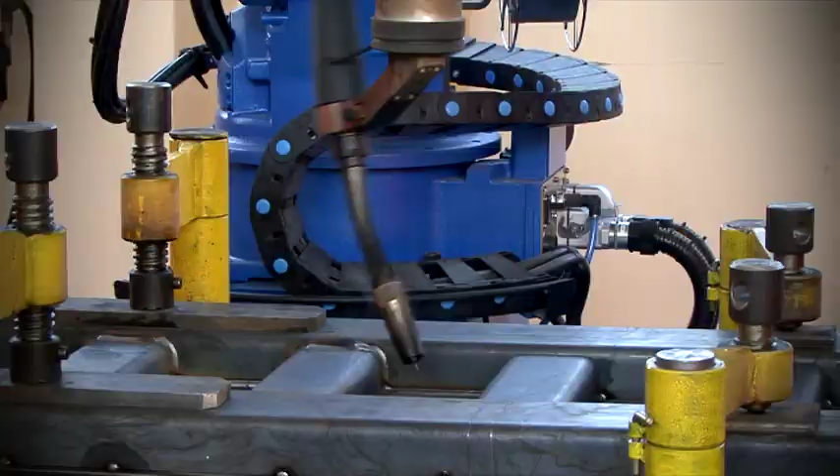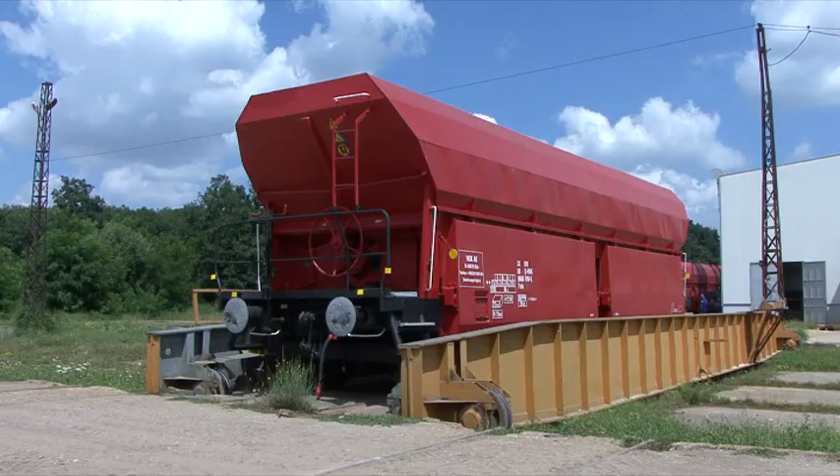Traktsia AD is a private joint stock company specializing in the manufacture, repair and modernization of freight wagons. As a successor of wagon repair plant Samuil, founded in 1972, Traktsia AD combines long-time experience with traditions in repair work, in accordance with European norms and requirements.

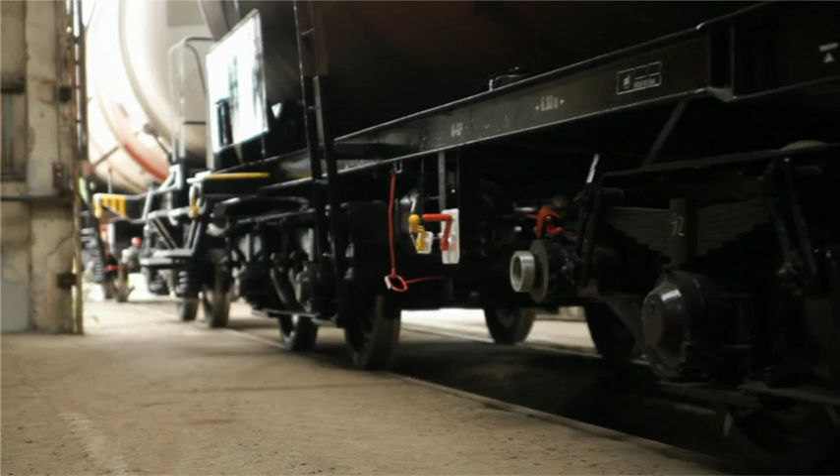Thanks to its many years' experience and the high quality of its products and services, Traktsia AD has built long-standing partnerships with companies like VTG, GATX, On Rail, NACCO, Ermewa, ERR, Locotrans, Lukoil, BDZ, Holcim, DB Schenker and others.

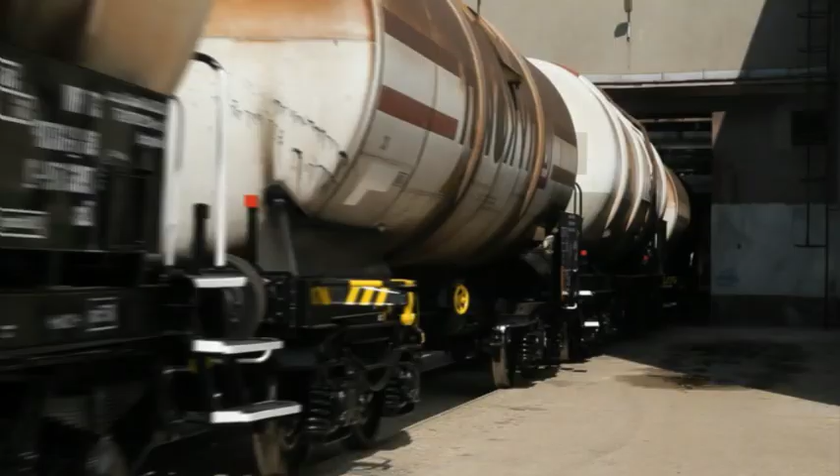Traktsia AD's production activity is divided in two main lines. The first main line is freight wagon manufacture. The company manufactures open freight wagons and flat wagons in compliance with all European standards and normative documents, including those concerning TSI wagons and TSI noise.

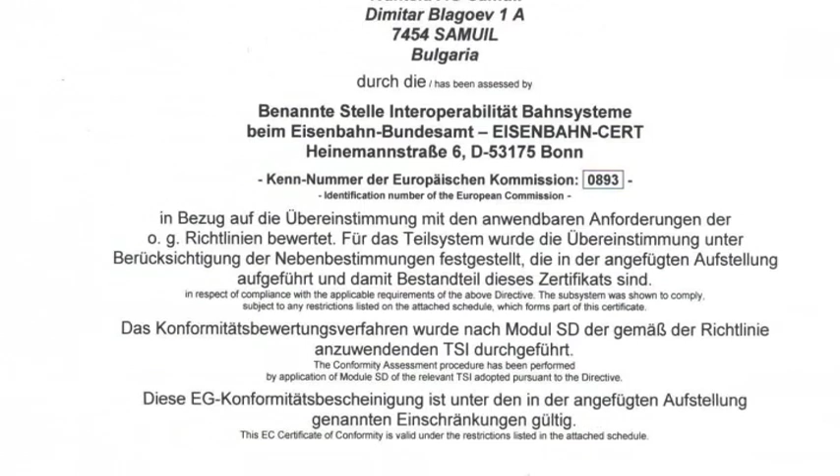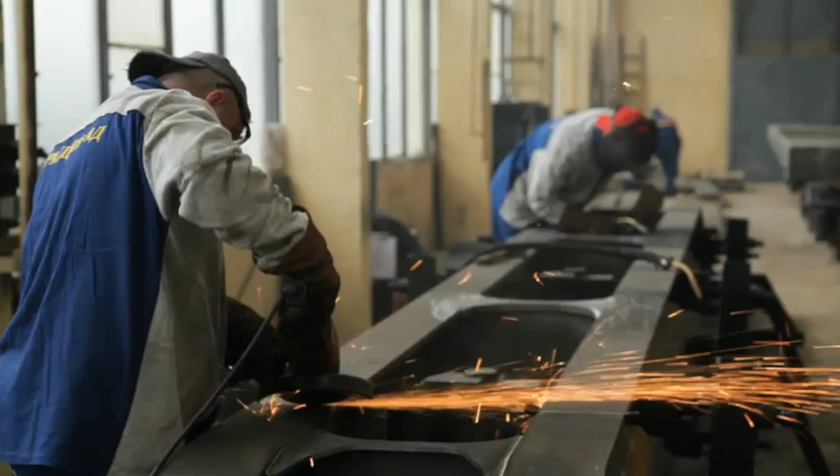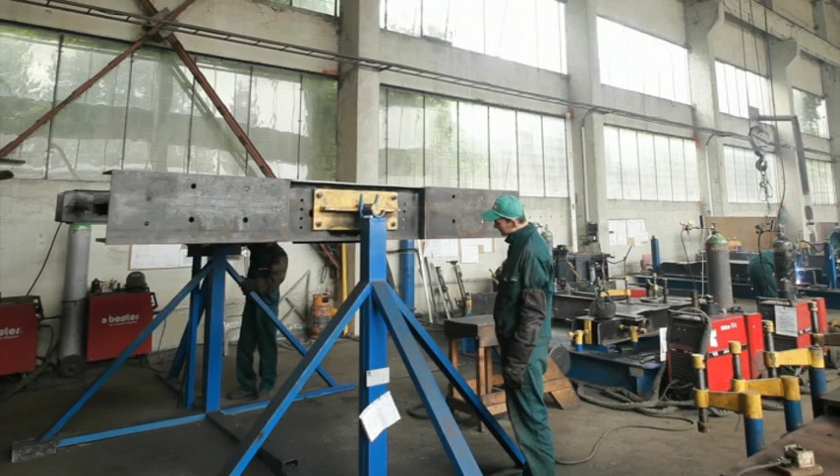The manufacture of the wagon frame main assembly is carried out in two separate facilities. For this process, the necessary technological equipment has been installed, including jigs for each single assembly, welding positioners ensuring a high quality of welding process, a portal for automated underflux welding,

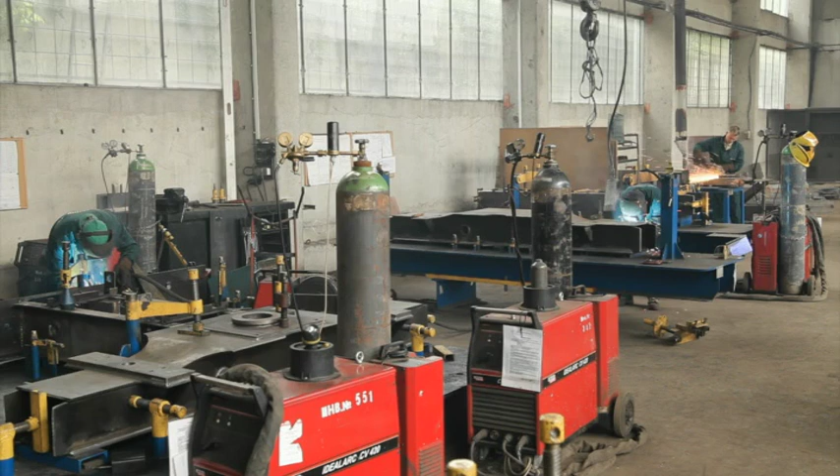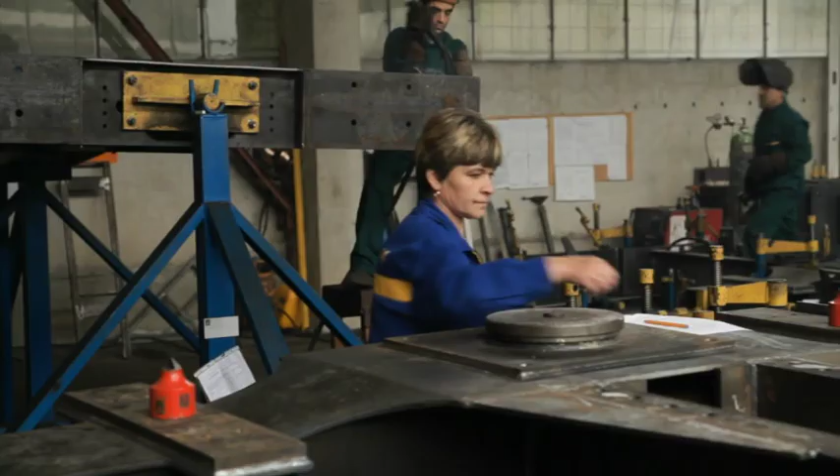machines for welding in a protective gas environment, hoisting equipment, monitoring and measuring equipment, as well as all the necessary storage areas. The final frame assembly is done on special jigs that guarantee the correct geometrical dimensions and the proper positioning of different assemblies and parts.

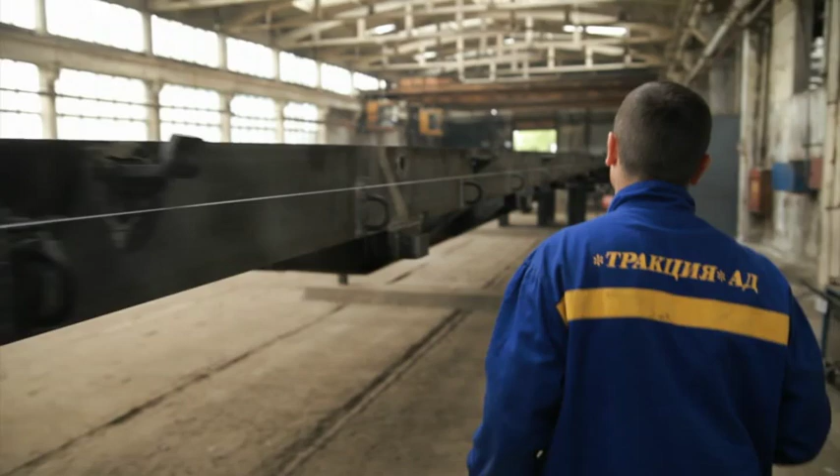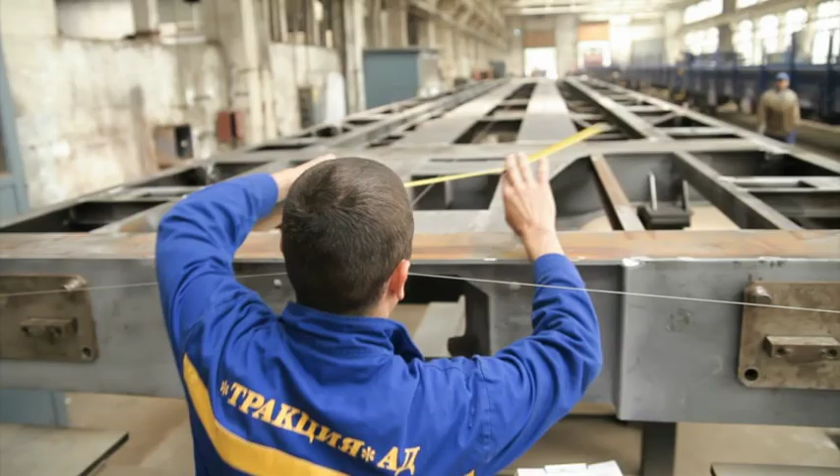After being installed, the frames are set on a positioner for the final completion of welding process. The frame's dimension control is carried out on a measurement stand designed to ensure that all the dimensions specified in the quality standards for this type of production are duly measured. Having passed quality control, the frame is fitted with the necessary elements and assemblies in different stations, depending on the manufactured wagon type.

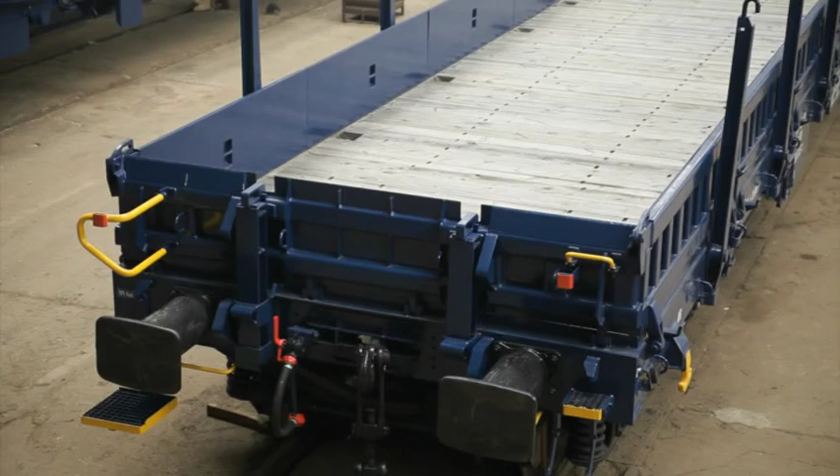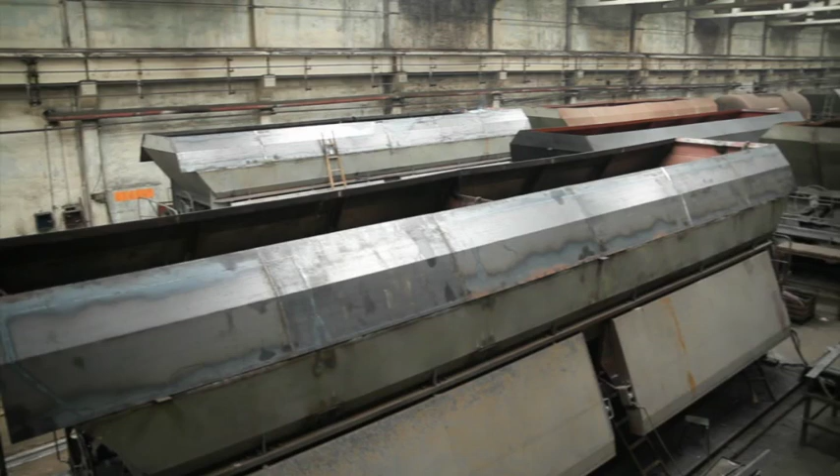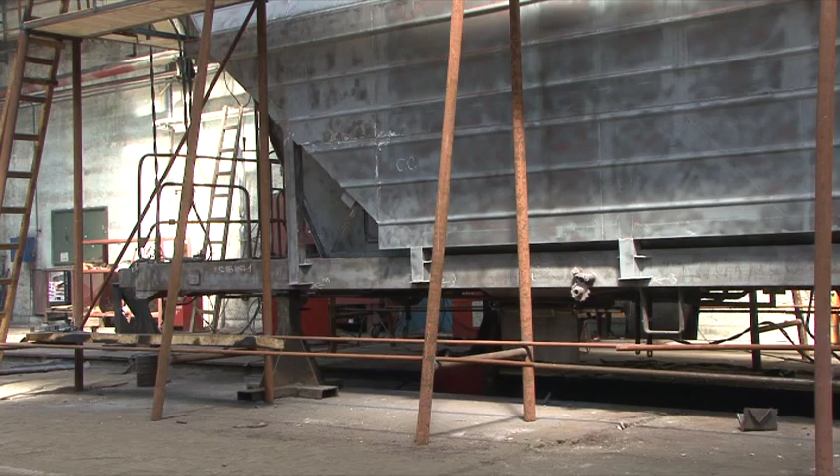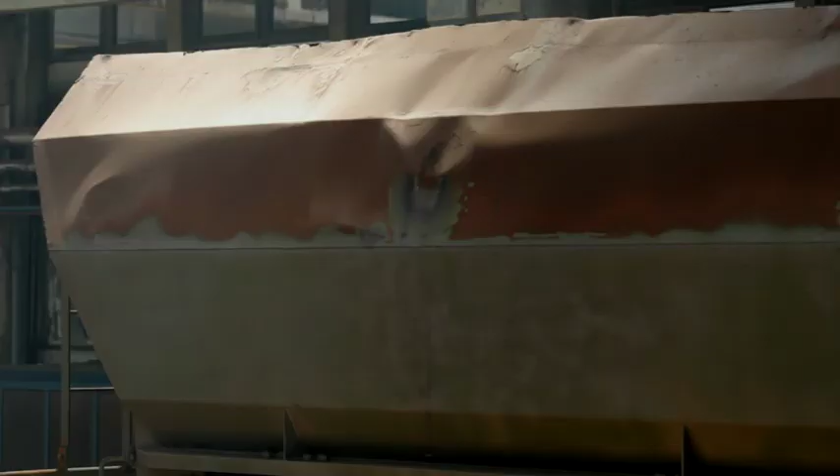The second main line is implementation of planned and unplanned repairs of freight wagons, as well as modernizations of different kinds. This work is carried out in two main production facilities. The first facility is for repair of the frame and body of the wagons. There are 12 workstations. Each of them is equipped with the necessary machinery for welding in a protective gas environment, gas flame cutting equipment, mechanical and electrical tools, etc.

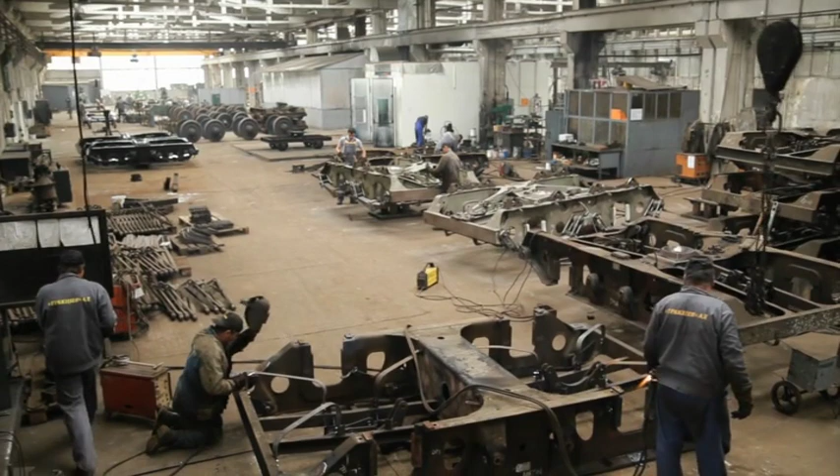A hydraulic stand is installed in the facility to ensure the right geometry of the wagon body. The second facility is for the repair of wagon running gear. The facility includes two main sections. One of them is for repair to the bogies. It has 6 workstations for checking and replacing the unfit parts of a bogie frame and lever brake system.

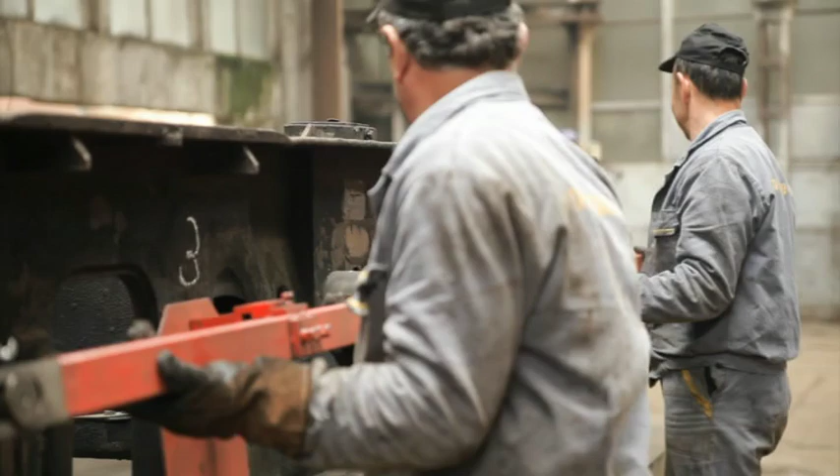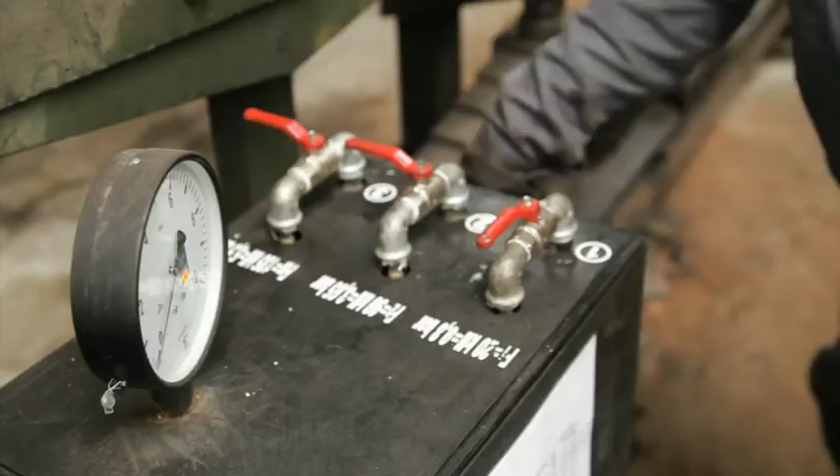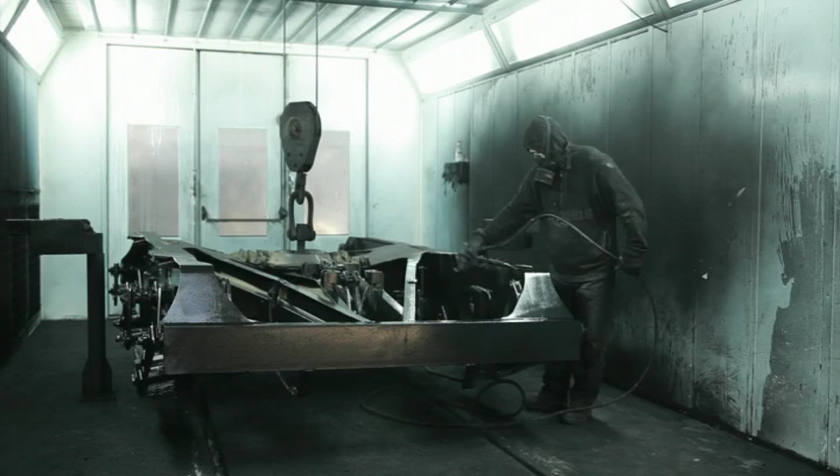A frame and bogie measurement stand, a control device for bogie springs and coiled springs. On completion, the repaired bogie is painted and baked in a combined paint chamber.

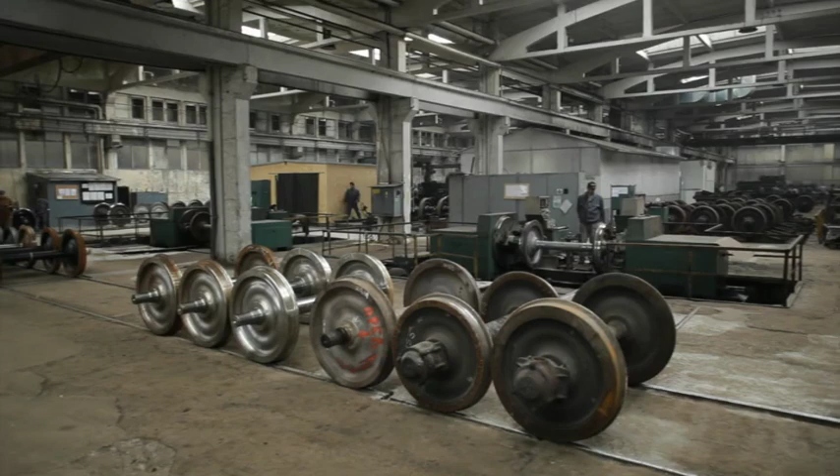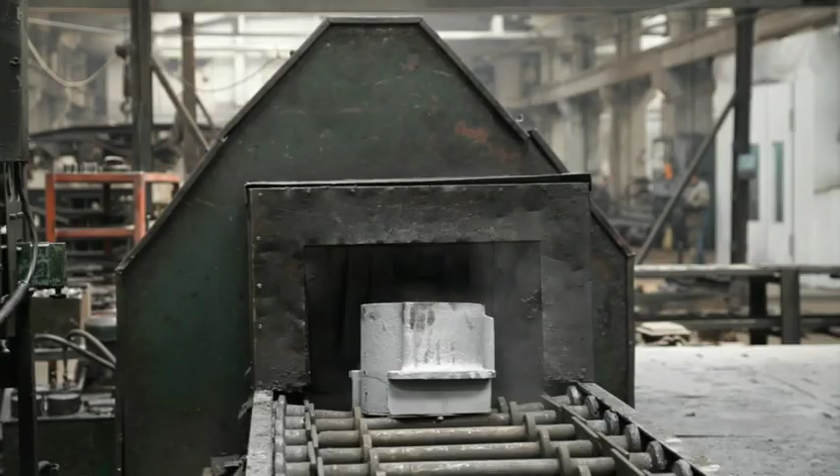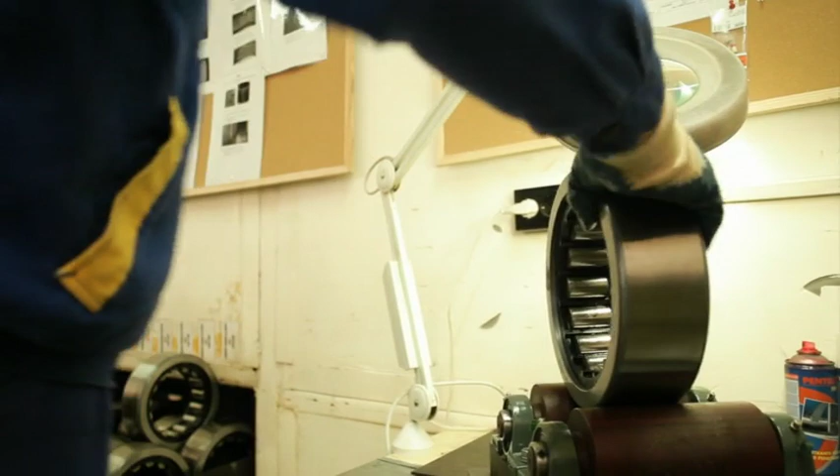The other section is for wheel axle repairs. It has a robotic complex and a production line for dismantling bearings and bearing boxes and washing them in specialized machinery. The cleaned boxes and bearings undergo a final cleaning and quality control and are then prepared for assembly.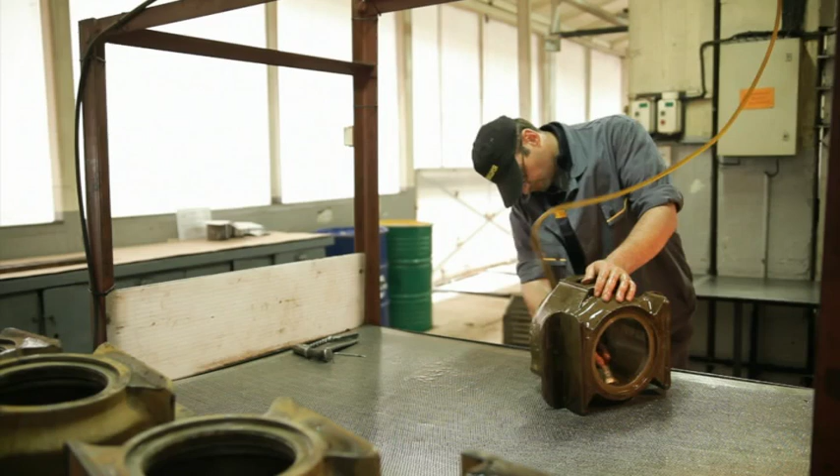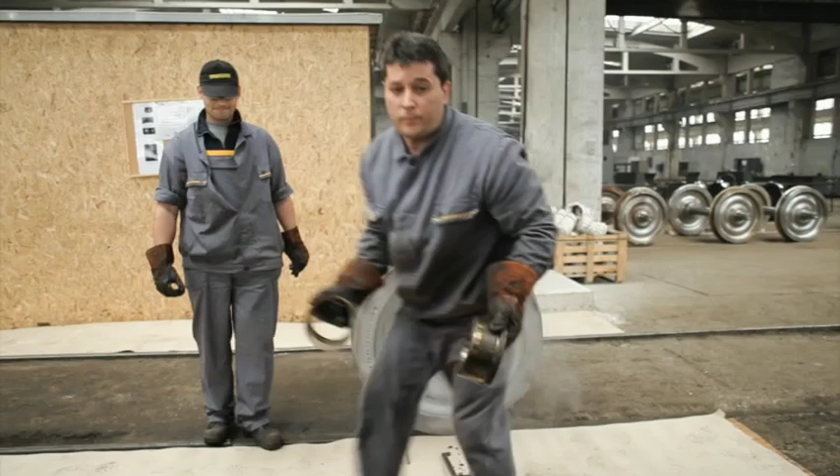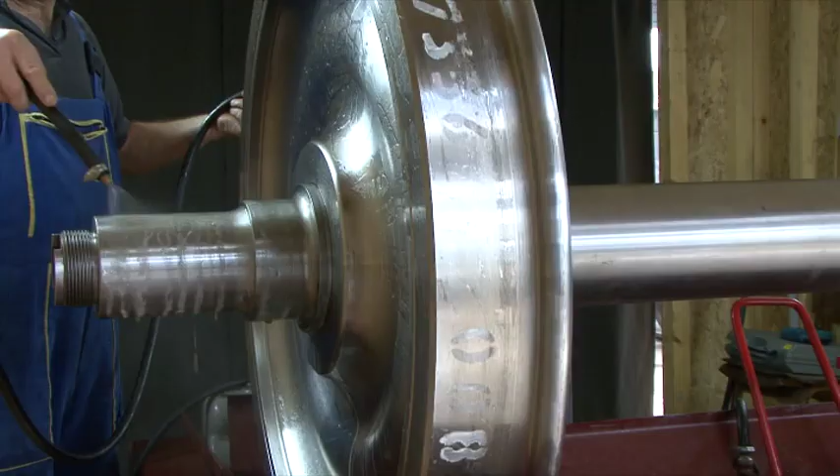The wheel axles are cleaned of old paint. The internal bearing bushes and labyrinth rings are dismounted with the help of induction heaters. The cleaned wheel axles pass ultrasonic and magnetic defectoscopy, performed by specialists that have all the necessary international certificates for this kind of activity.

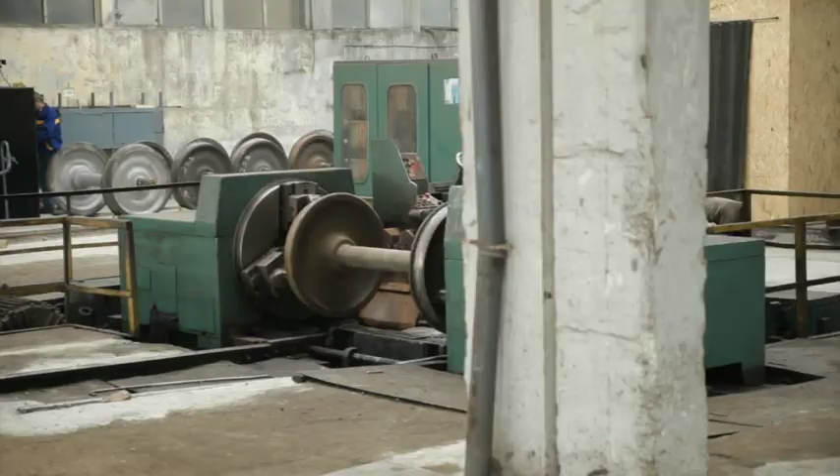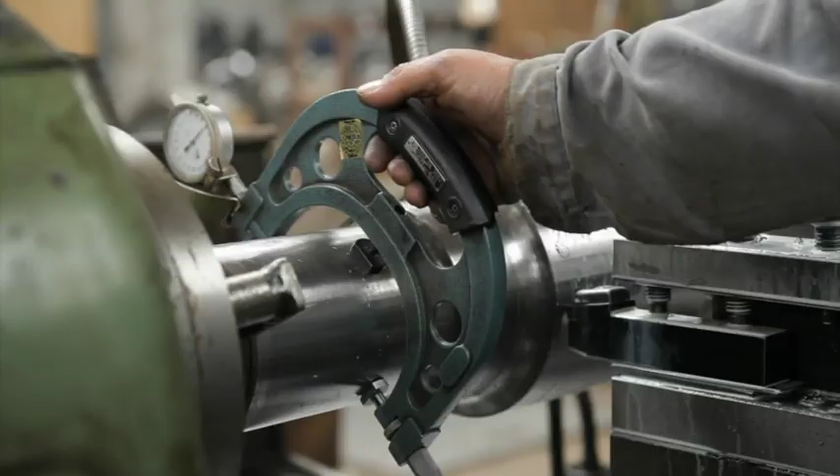The rolling surface processing is carried out on two specialized CNC-facing lathes. Traktsia AD is able to replace the unfit wagon wheels with new ones. After quality control and processing, a new coat of paint is applied on the wheel axles in a paint chamber.

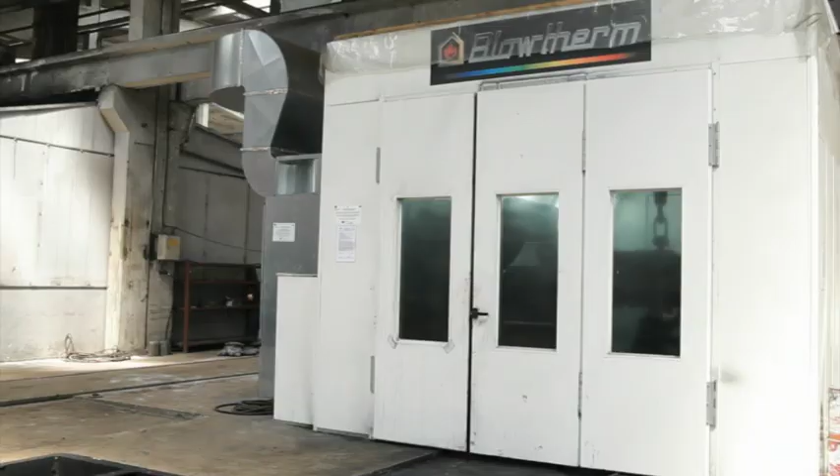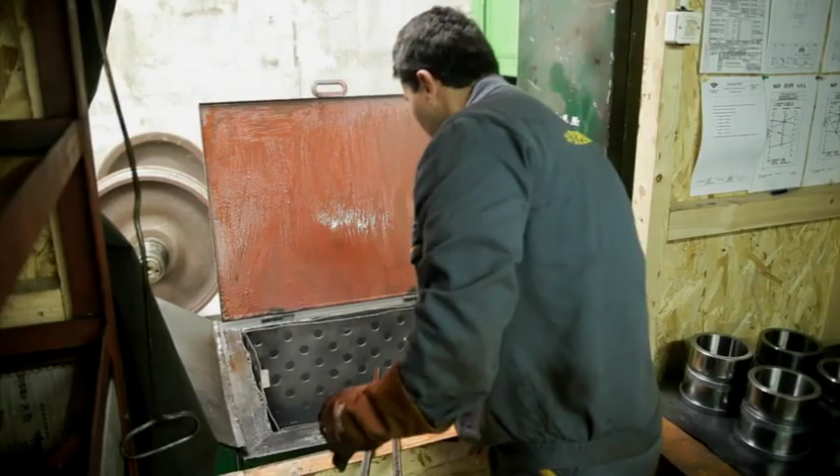The mounting of labyrinth rings and bearing bushes is done in a separate room with the help of induction heaters and oil bath heating. The assembly of bearings and boxes is done in a specialized room fitted with all the necessary devices and measuring tools.

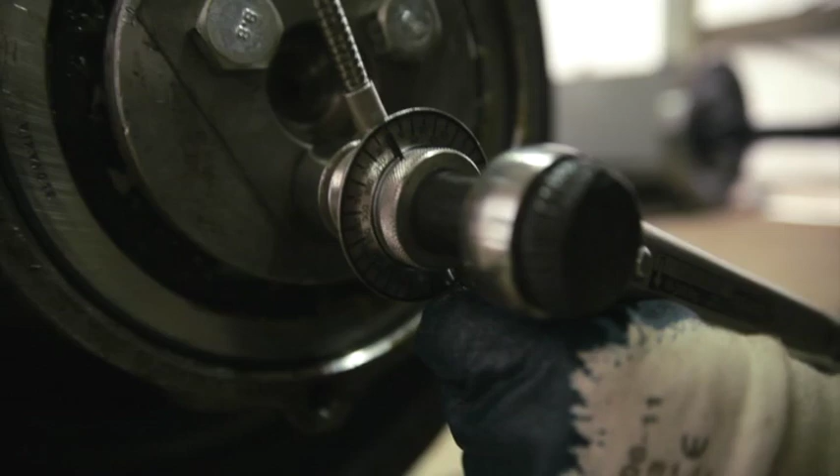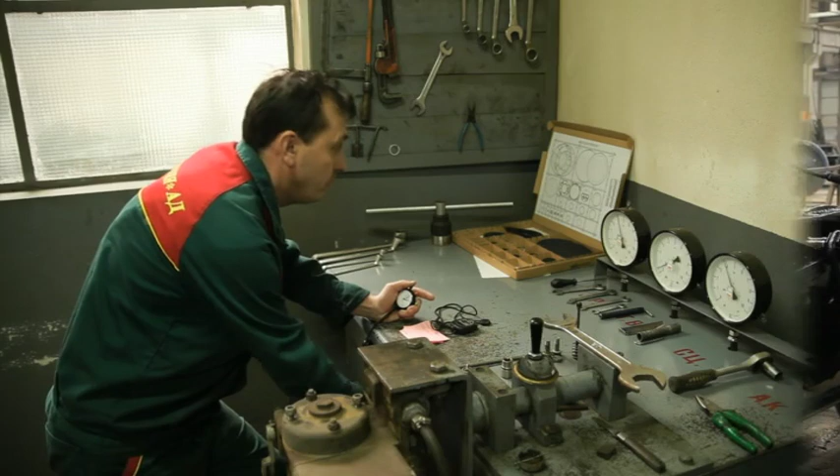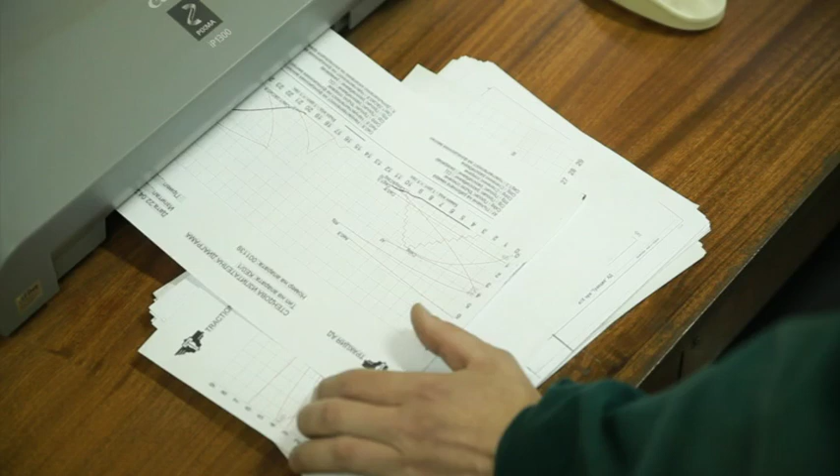The brake system elements are repaired and tested in a specialized section. It has all the necessary stands for testing the main components of automatic train brakes. A special department is furnished for the repair and diagnostics of air distributor valves type KE1 and KE2.

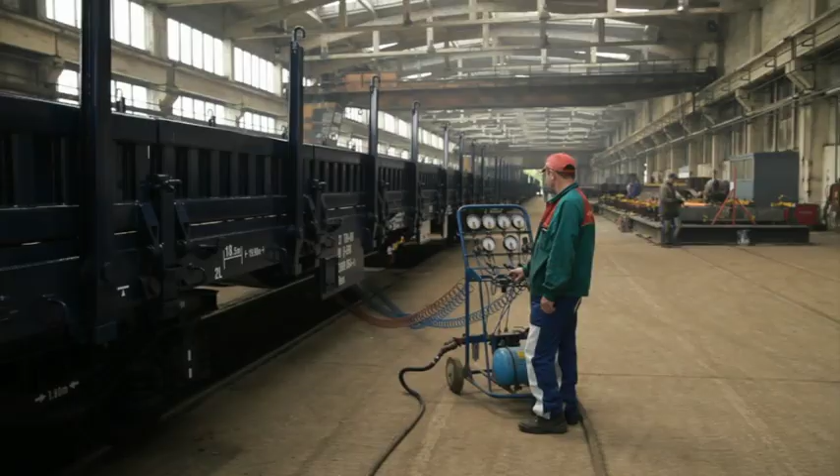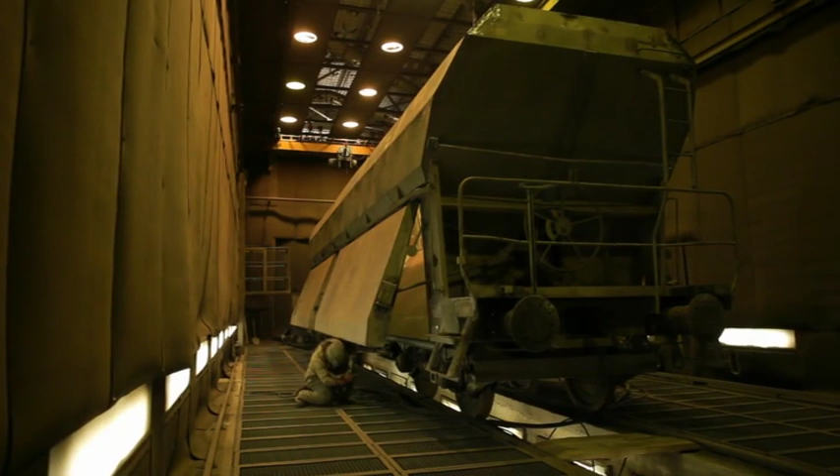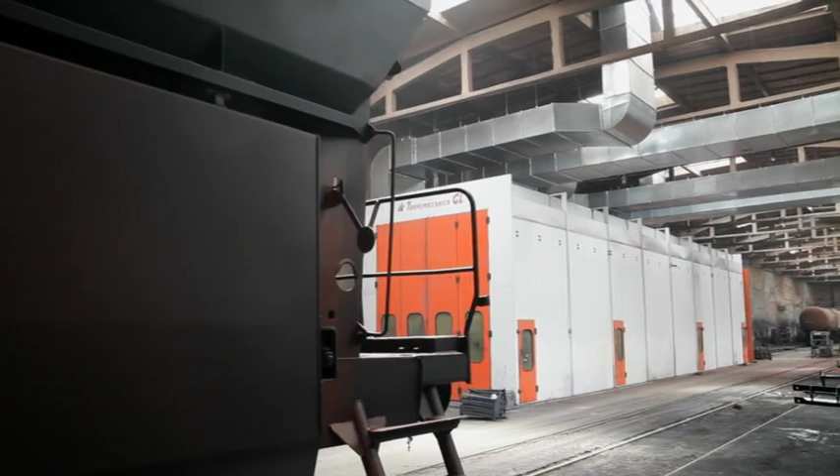The next step in manufacture or repair of the wagon is its preparation for painting. This is done in a specially designed blast chamber. The painting and the paint baking are carried out in specialized paint chambers provided with mobile platforms for moving the workers during the painting process.

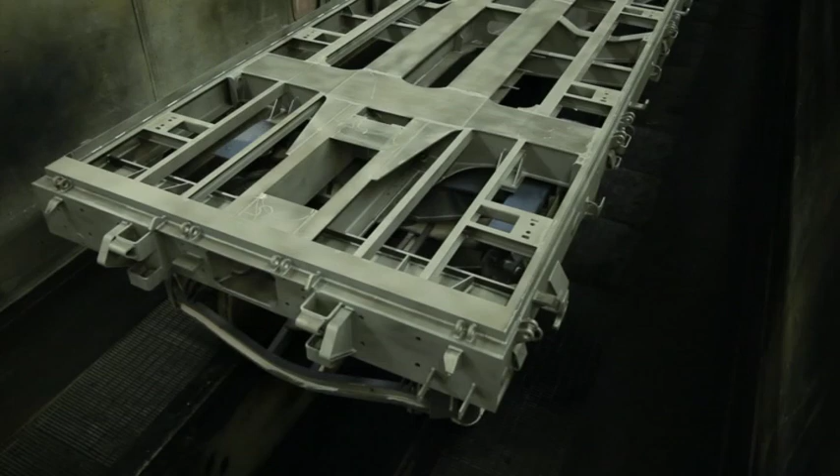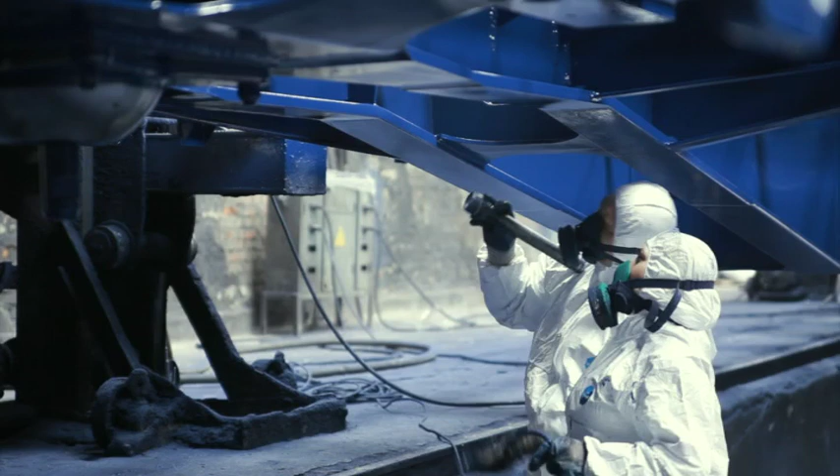To guarantee the high quality of the process, modern airless spray machines are used which allow the implementation of all kinds of painting systems. The coat thickness is controlled by means of ultrasonic thickness gauges. At the end of the work process, the wagon is gauged and handed over to the customer.

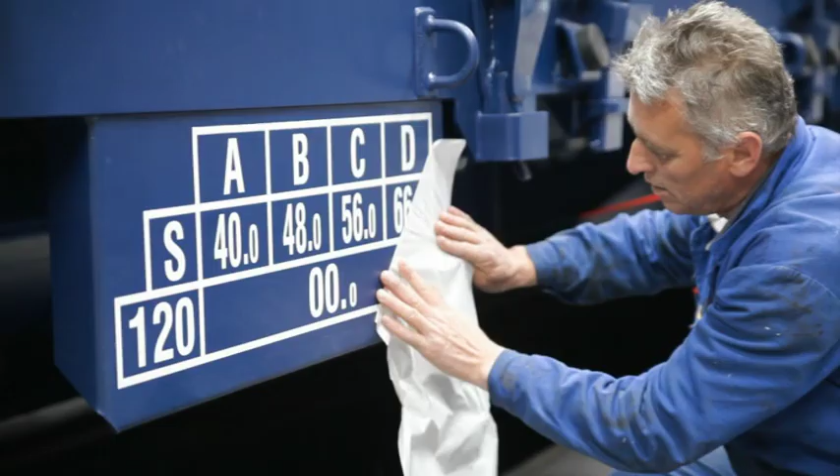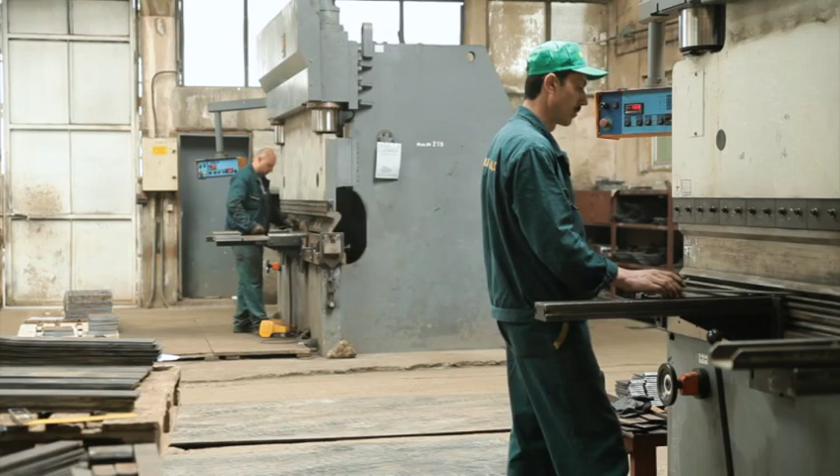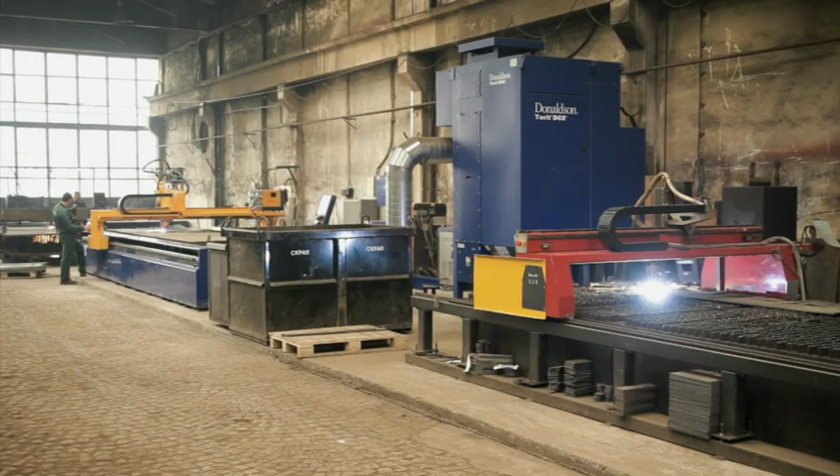The necessary parts and elements are manufactured in 3 sections. The first is for cutting. It is equipped with guillotines, sheet bending machines and press shears. 3 CNC-controlled portal machines are set up here for plasma cutting of complex forms and greater thicknesses.

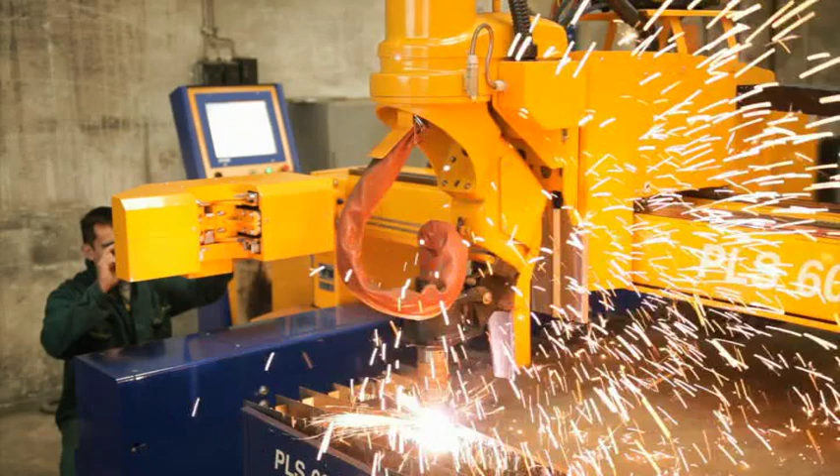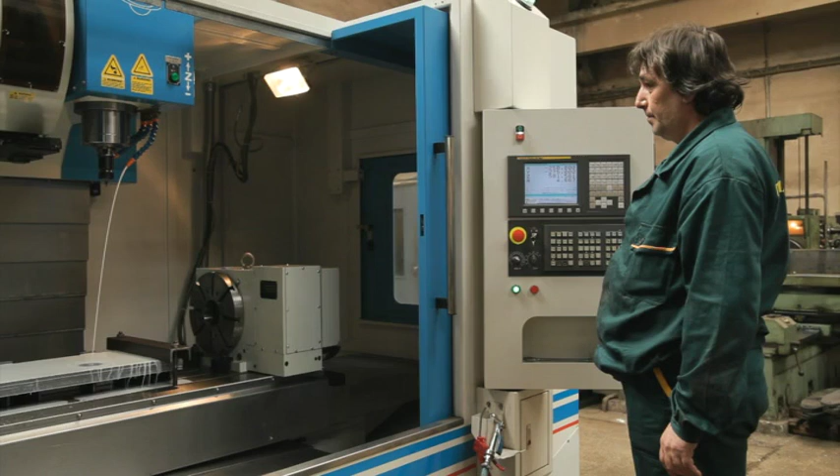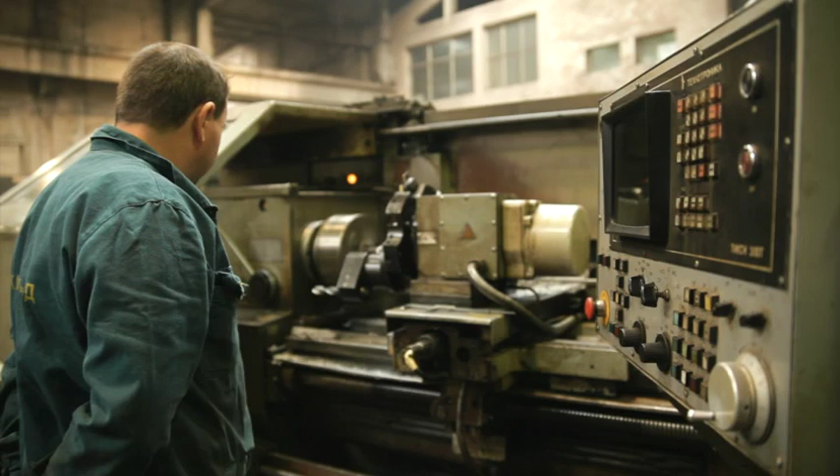The mechanical facility has modern CNC machine tools, as well as universal machines. The modern tools and technologies, the quality of the materials, and the highly qualified workers ensure the efficiency and quality of manufactured parts.

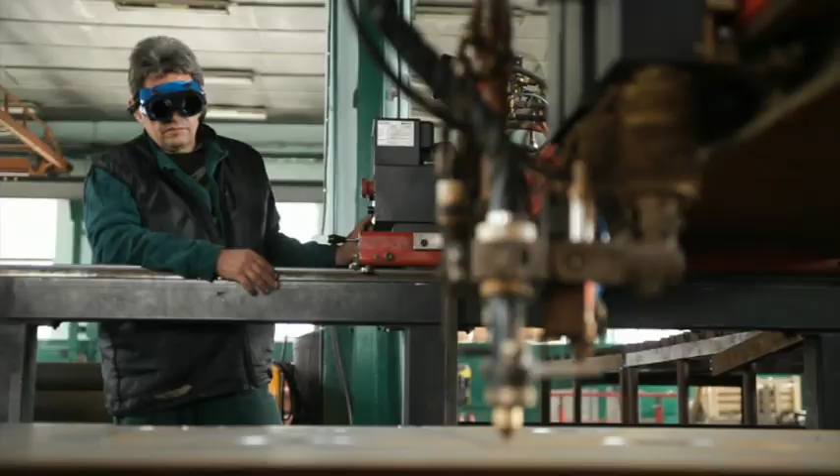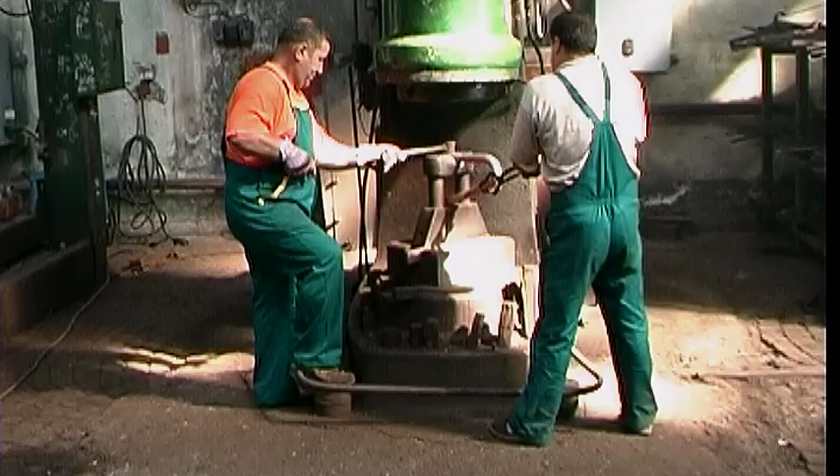The press forging facility has screw presses, eccentric presses, and pneumatic forging presses that ensure the efficiency and quality of manufactured parts.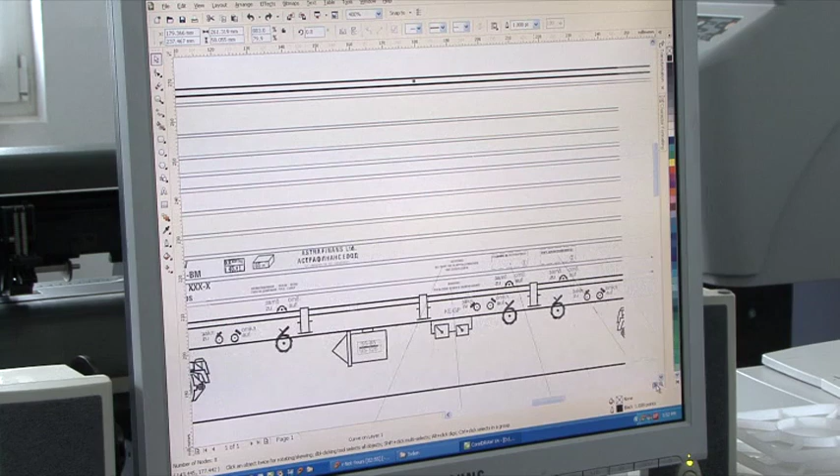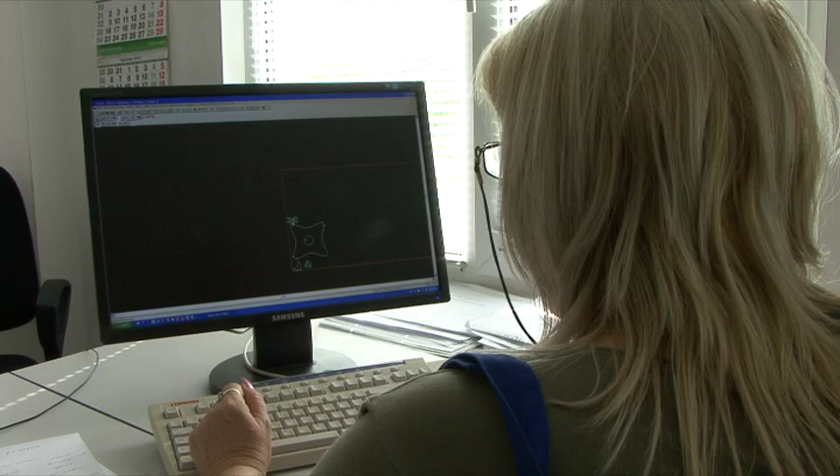In order to meet customer requirements concerning the manufactured product, Traktsia AD has implemented a quality management system, ISO 9001-2008. The entire manufacturing process is monitored by experienced controllers, strictly following the design and technological specifications and customers' instructions. The up-to-date versions of leading CAD/CAM systems help to solve the tasks at hand.

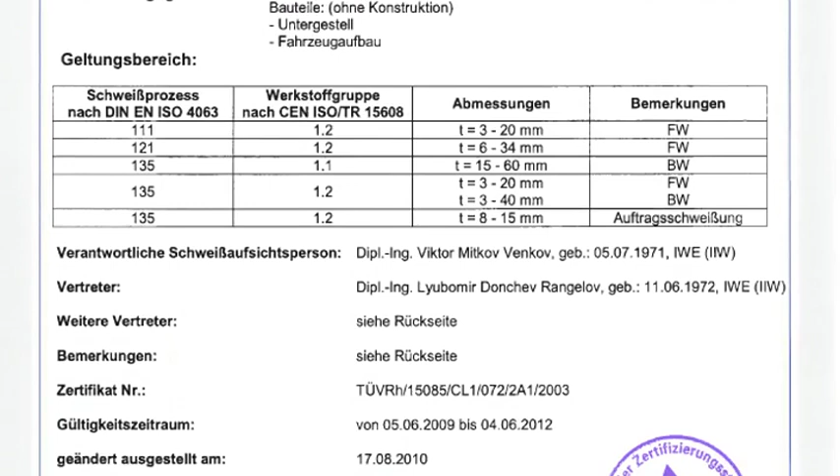Precise execution in welding is the main quality factor for the entire manufacturing process. For that reason, Traktsia AD has built a welding processes management system in accordance with EN 15085-2/2008 requirements. The system is certified by the German company TÜV Rheinland. The elaborate documents for manufacturing process management and approved welding procedures ensure the suitability of the main and auxiliary tools used, and the quality of the welded elements in all sections.

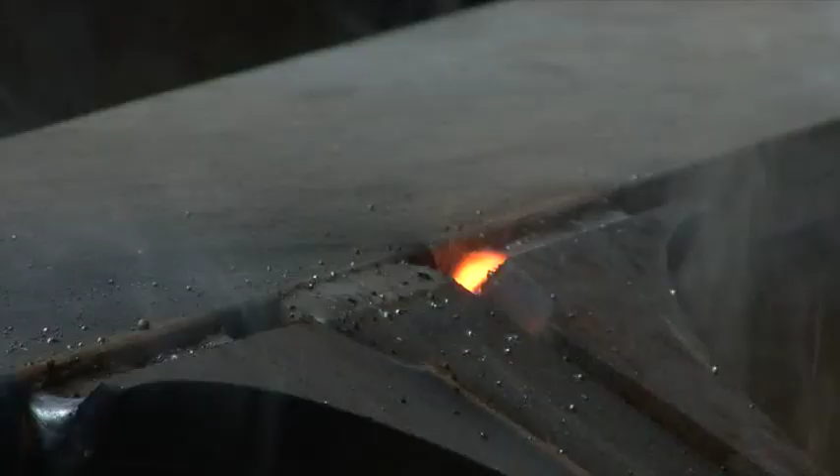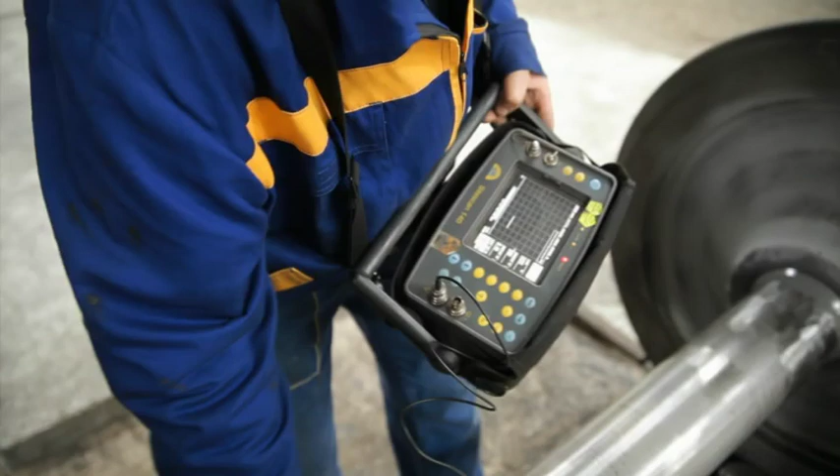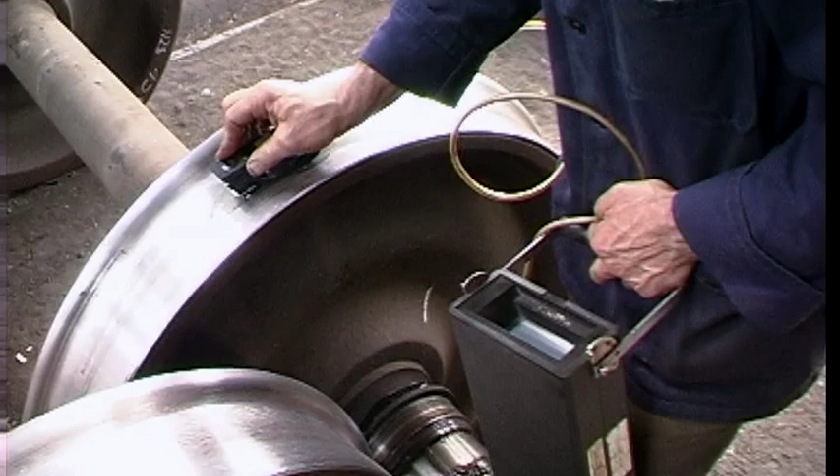In order to monitor quality, Traktsia AD has modern, up-to-date equipment. The company's specialists certified for carrying out the required tests, ultrasonic and magnetic defectoscopy, control and record all stages of the manufacturing process. To guarantee the quality of freight wagon repairs, Traktsia AD is certified under VPI, the system of requirements for the proper implementation of freight wagon repairs, which every plant of good reputation should meet in order to keep its customers and to attract new ones.

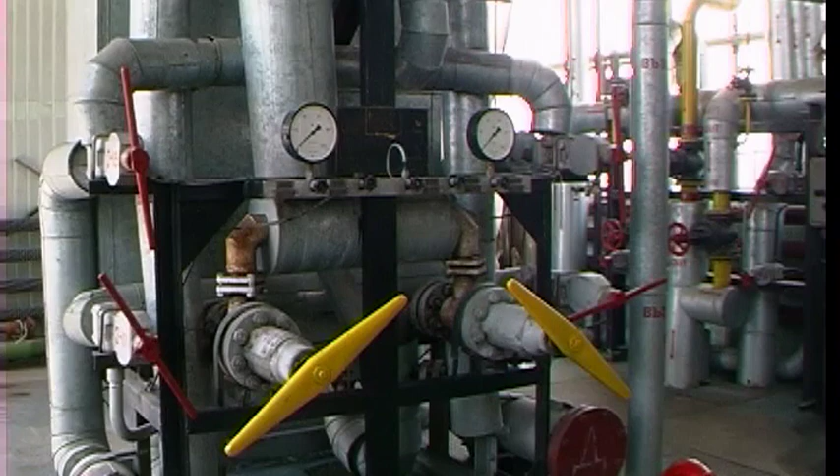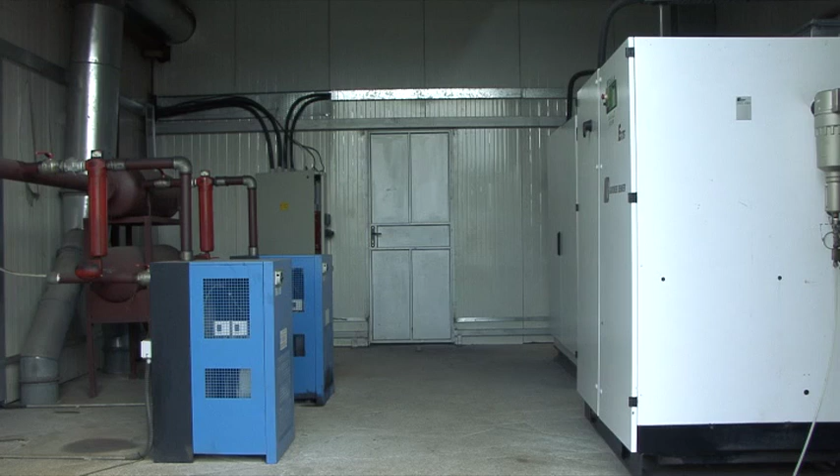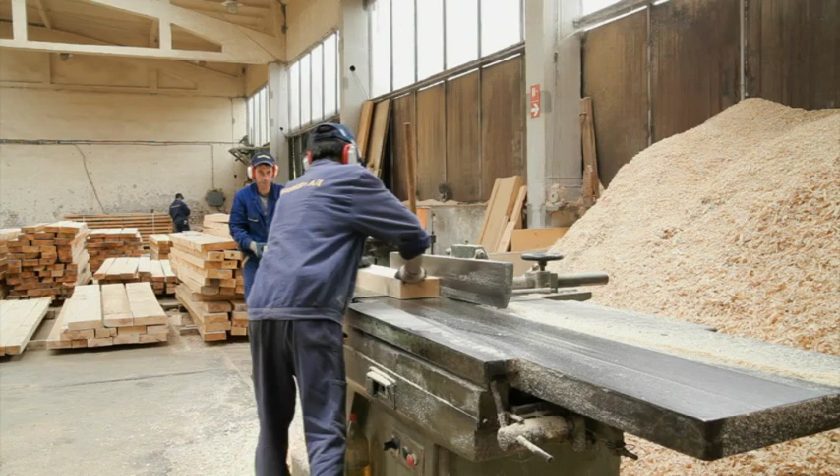Traktsia AD has its own oxygen station, gas station, compressor facility, water tower, and woodwork shop. These supporting units shorten the time for wagon repair and increase service quality.

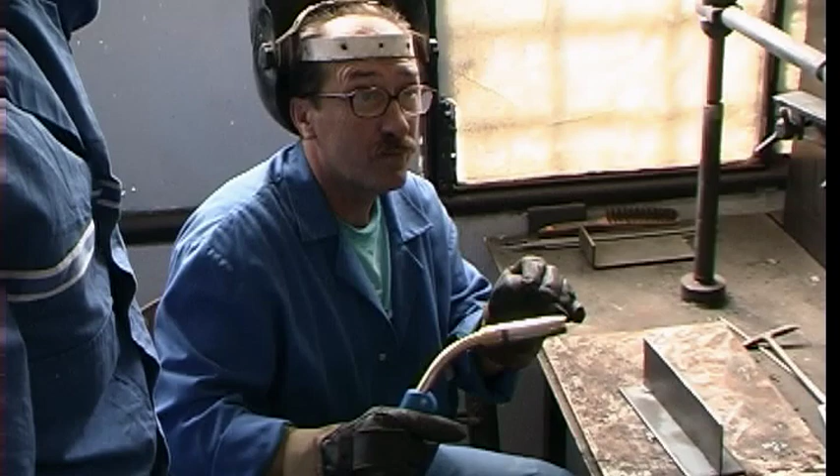In order to maintain the welders' high qualification level and to train new staff, the company has established a welding training center, certified by all the necessary authorities. The welders' skills are periodically examined at the center.

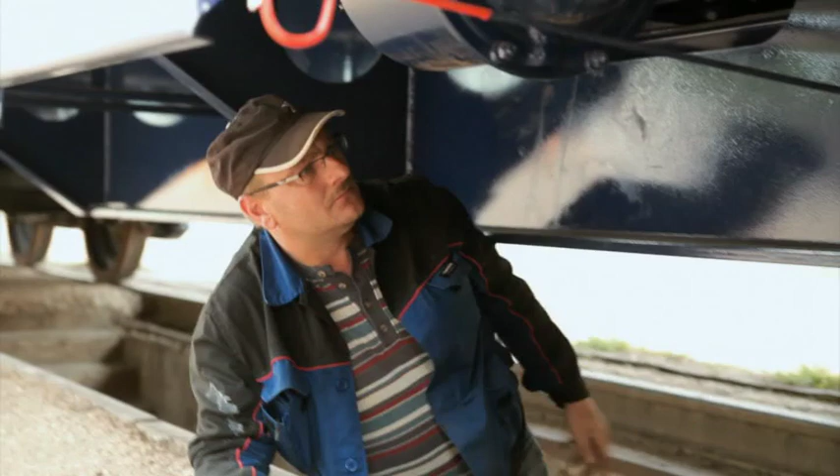The product quality, correct relations with business partners, together with long-time experience and tradition, allowed Traktsia AD not only to keep its established position both on the Bulgarian and international market, but also to attract new customers looking for high-quality fulfillment of their requirements, which the company is able to offer.